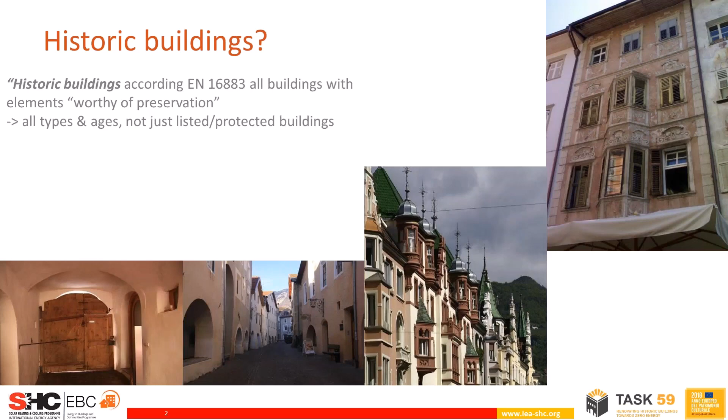So speaking about historic buildings, what do we mean? We orientate ourselves by the European standard 16883, which basically includes all buildings with elements worthy of preservation for architectural reasons or cultural or heritage reasons, which means basically we include buildings of all types of different uses from all ages, whether they are listed or somehow protected or not.

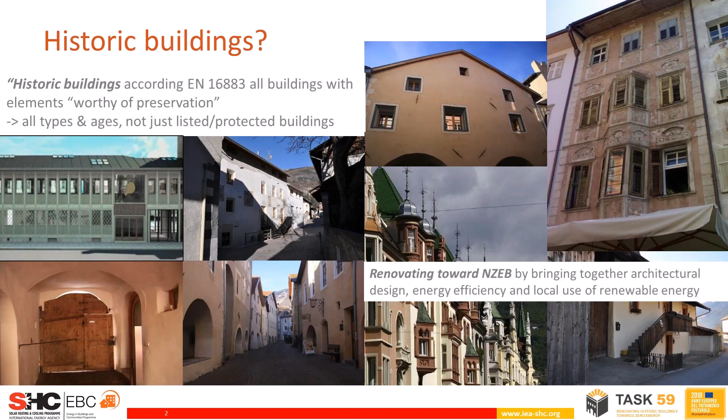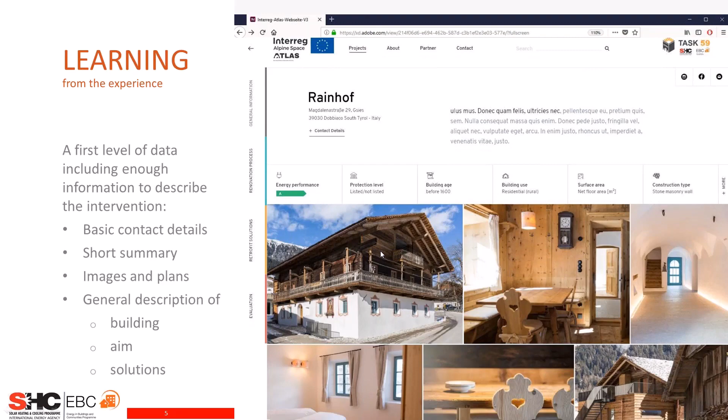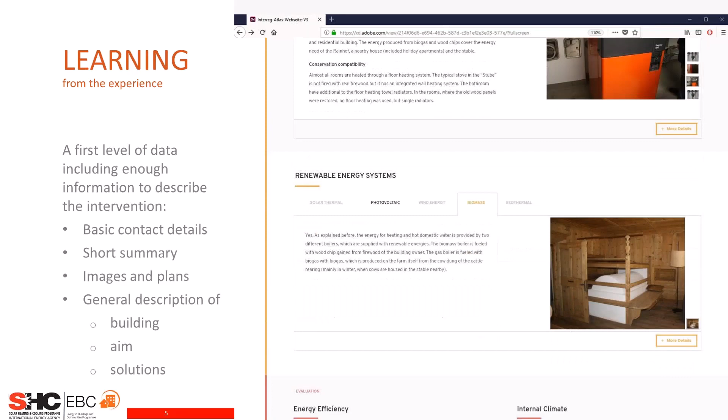So I would like to talk you a little bit through the different levels of information we provide in this platform. On the first level of information, you would see all the contact details, a short summary of each case study. You would find images and plans, of course, and if you go a little bit deeper, hopefully well-balanced pictures, drawings, text, also on the renovation process, but also on the technical interventions, walls, windows, HVAC, but also renewable energy systems. And finally, the evaluation part on the energy efficiency, costs and indoor climate, for example.

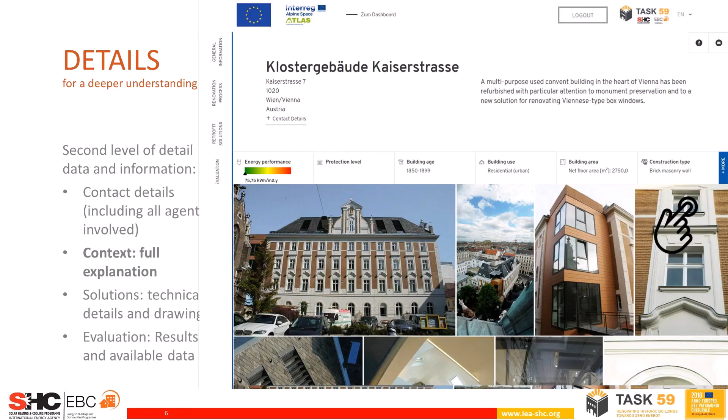This is an example from Vienna. If we go a little bit deeper here, you would find more specific information on this key information, building age, building use, technical data on the building, but you can also step into more detailed information on the renovation process from this point, or on specific information on the retrofit solutions, for example. So if you go down here, you would find a verbal description of retrofit solutions, for example, for the wall, but also reasons why specific interventions were chosen.

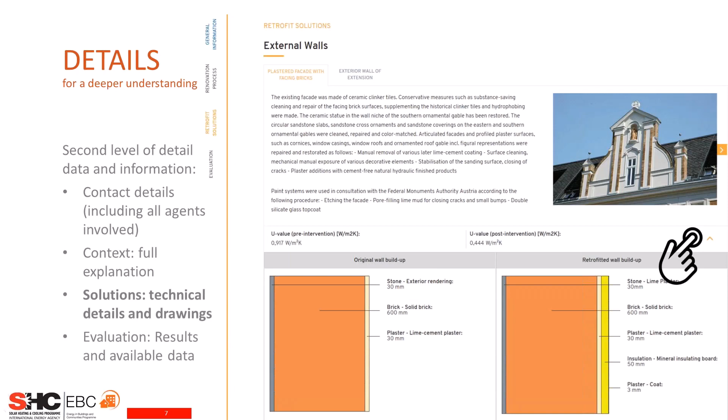You find U values, for example, before and after the intervention, but you can go one step deeper. And there you would find, for example, specific information, schematic drawings on the original wall build-up, but also the retrofitted situation. As you know, you will find that you have not only one type of wall in a building, particularly in historical buildings. You may find different types of walls, so there's also the possibility to find different solutions for different types of walls for a specific case study. And also the verbal description.

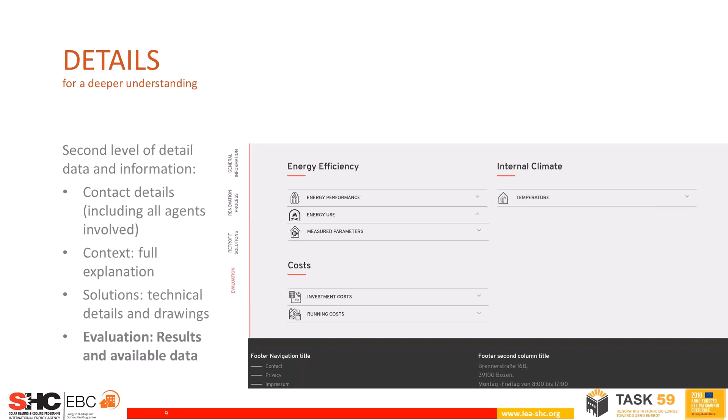And then finally, what is very important from our point of view, the evaluation part, where you find information on the energy efficiency, for example, actual data on the energy consumption for heating, but also data on not only the investment costs, but also, if available, the running costs and data on indoor climate. If there are no measured parameters for a case study, there is also the possibility to give a verbal description, for example, the feedback from the users on indoor air quality or acoustic comfort. But as you can see here, if there is such a document available, we provide, for example, a post-occupancy evaluation as a download from this platform.

So this is basically the content on the different levels you would find. As you can see on these logos, this is a combined effort from both the Interreg Alpine Space project, which involves 9 partners from 6 countries, and the already mentioned Task 59 from the IEA SHC program, which involves 24 partners from 12 countries.

And as I've said, we are aiming at about or more than 100 projects. We are happy to have established already the connection to other platforms, for example, to Construction 21. And we are also looking forward to connections, for example, to national platforms, as, for example, Stadt der Zukunft in Austria, but we know there are other possibilities to establish such platforms.

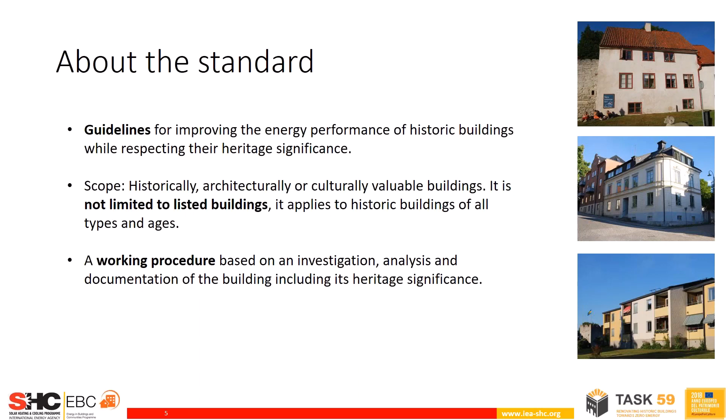It presents a working procedure which is based on simple steps: investigation, analysis, and documentation of the building, including its heritage significance. Now, this is the Solar Academy, and some of you may think, where does solar energy come into play? Well, the standard deals with improvements and energy renovation, applying both to the demand and supply side.

The standard or the guidelines presents a procedure to facilitate the best decision in each individual case, rather than trying to point at good or bad solutions in general, because as we all know, historic buildings as well as buildings in general represent a wide range of uses, construction types, so it's difficult, not to say impossible, to point at universally applicable solutions, but we rather point at a way to reach a good solution in each case.

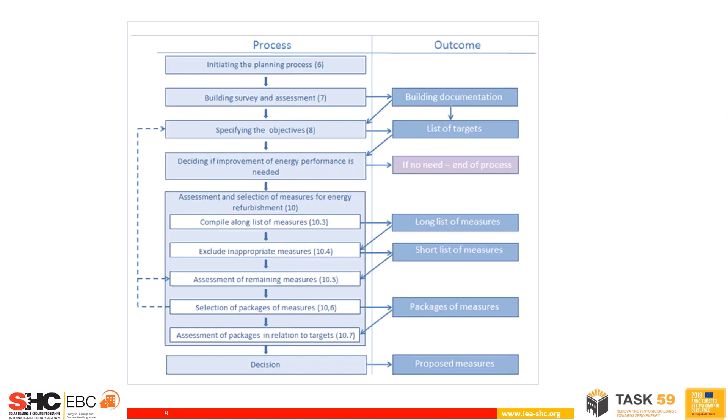For those of you who work professionally in the field, I would assume or hope that this is nothing new, but rather something that you recognize. For those of you who may be private homeowners, this may be completely new. So this means that the standard, or the guideline, can be used in several ways. You can use it for quality assurance and then follow it strictly.

Suppose the authorities in a country or a region want to ascertain that when we work with historical buildings of a certain value category, we follow a certain procedure. It can be used as an inspiration to modify existing procedures. I think that most professionals working in the field, one way or another, already have a working procedure. And finally, it can be used as a simple checklist, as a whole or in parts.

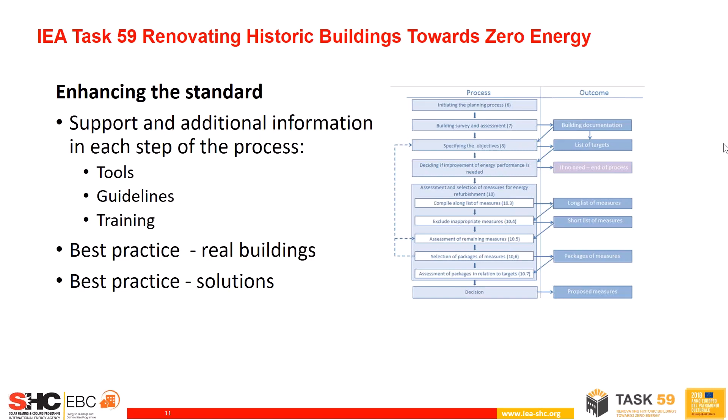Some questions to the audience: is the standard known, is the standard being used? We're trying to find projects and professionals who have used the standard, and we want to find out how it works in practice. Within Task 59, we're working to facilitate an extended use of the standard by enhancing it and providing additional information in terms of tools and guidelines, the need for training, and we also have other tools in our toolbox. Walter already introduced the best practice database, and we also have a database for single solutions that are suitable for different types of historic buildings.

So in summary, my objective with the presentation was to let you know that there is a standard. There are also other guidelines that can be used, and we're always looking for more case studies. So if anybody is interested in using the standard or already has done it, please feel free to contact me. And also, of course, if you have any questions.

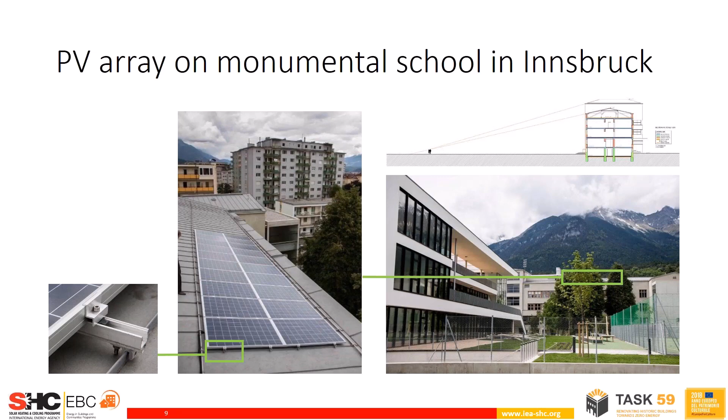So that's why we also decided to create the decision guidance tool, to document such good examples and many more that can show others how to follow such installations without starting from the beginning, and to share these success stories. So now I would like to show you the functionality of the tool. It's not the real website, but just a presentation where you can see how the tool is supposed to work.

To be able to cover all the renovation measures, not just solar, but all of them, we decided to display first a cross-section of a building where everything is involved and visible. So the user can select by clicking on the building element, or select from the menu on the left-hand side. In this case, we would start with solar energy, right down there, like this. And then the user will be asked just several questions. The first one, for example, is whether you can install your renewables on the roof as the first, most advantageous option.

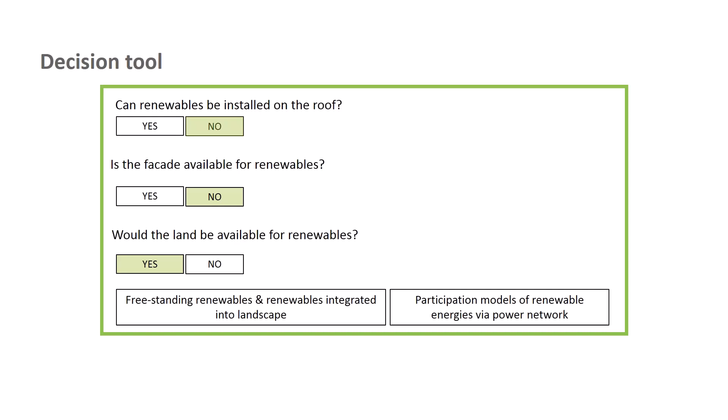If not, the facade is offered, and so on. And if there are really no other options to install PV on your building, then at least we would like to display solutions where a freestanding installation is allowed, or participation models of renewables via the power network. So if we used the same mentality and wanted to find this example of the school in Hötting, we would probably go like this.

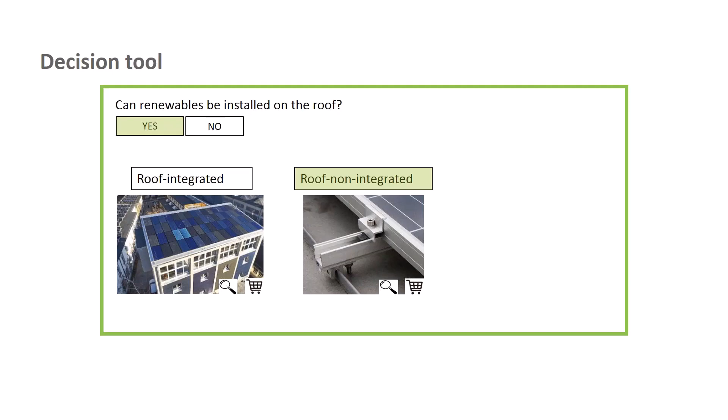So renewables on the roof, yes, but it should be roof non-integrated. Here we go, and then we click a preview, and then we're gonna see all the details about the installations and components, installation powers, and drawings.

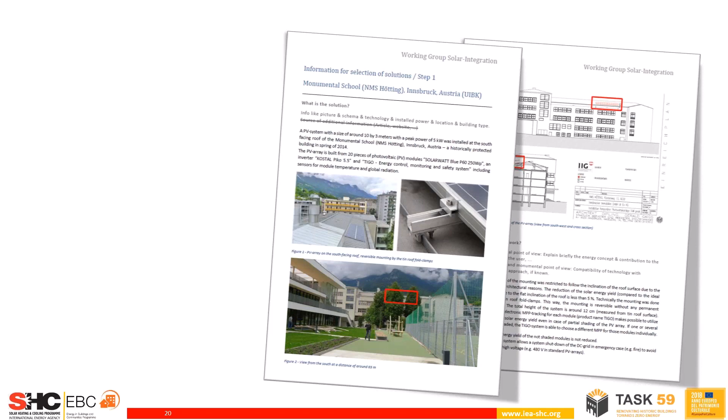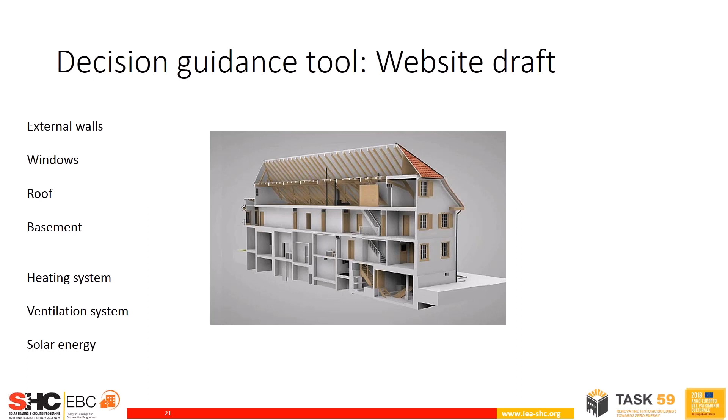So as I said, this tool is not restricted only to renewables, but as you see, to building envelope, such as walls, windows, roof, and so on, but also building services as heating, cooling, ventilation systems. So let's proceed with the example of our walls. So we click on wall.

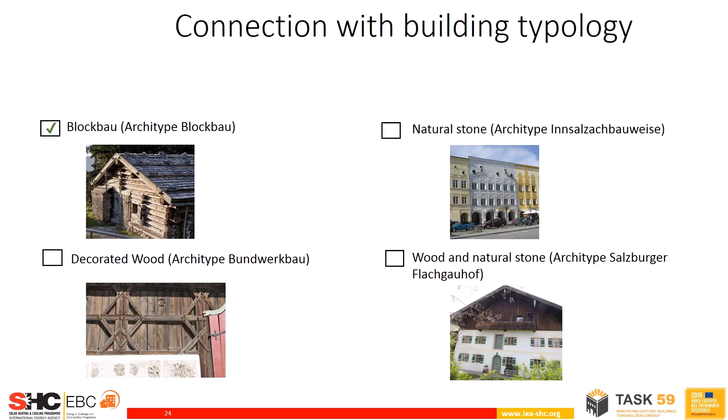And if you decide to use the map, you will be offered a set of archetypes, certain architectonical types of buildings. You select yours, and as before, you will be asked several sets of questions, which will break down the selection to just several. So you will be able to see and decide for general principles or particular examples of, in this case, wall insulation.

Since the walls are very much in connection with the windows, for example, after choosing your detail, you will be directed and offered also to see the window details, because these cross sections and details really matter while you plan your renovation. As you see here, each solution has a magnifier and a shopping bag. I will get back to it.

We are not a profit-oriented European project, don't worry.

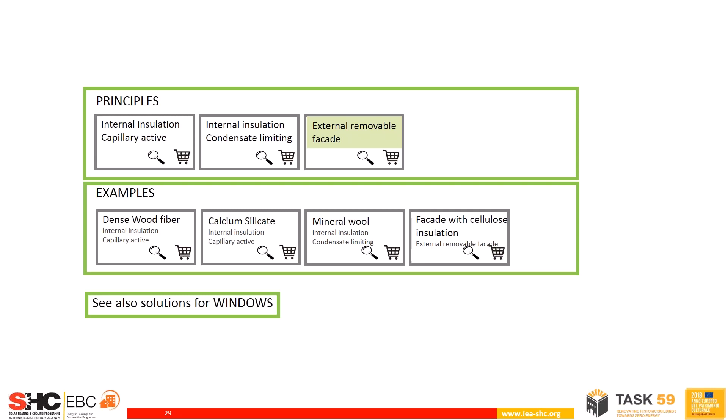So the magnifier is just there to increase the size and be able to read what is inside, and the shopping bag is basically just to save it into your bag for later printout. So if you click on the magnifier, you see the solution, and same as before, you can get more informed about what this solution is about. And if you would like to save it, you click on the shopping bag.

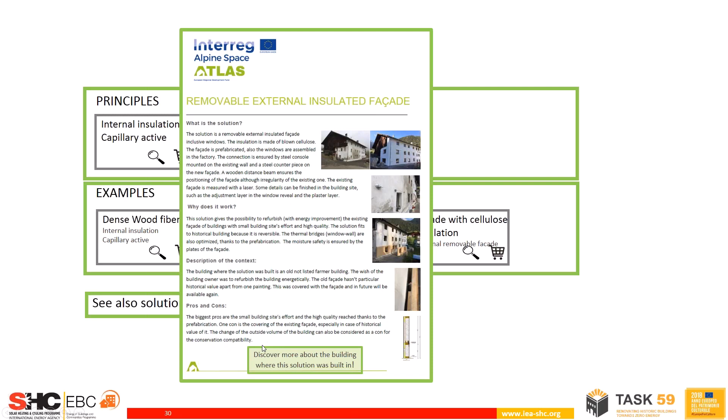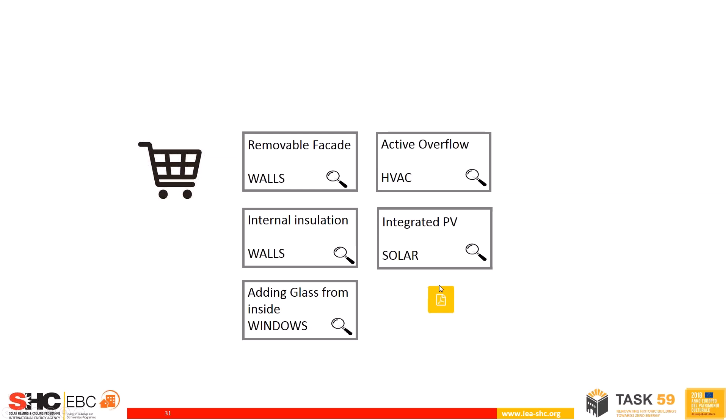If this solution is part of a building which is documented as a renovated building, so-called best practice, that was the part presented by Walter, you can also jump and see the building renovation in the database itself. And when you are done with playing and searching in the tool, you can go to this shopping bag or shopping trolley, where all your saved details and solutions are, and you can click and export them to a PDF once you're finished.

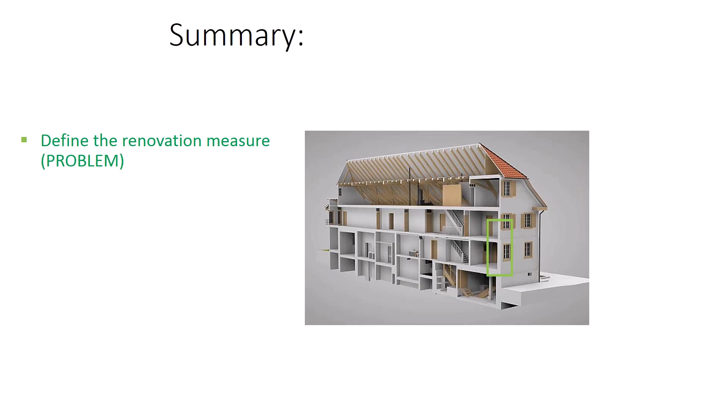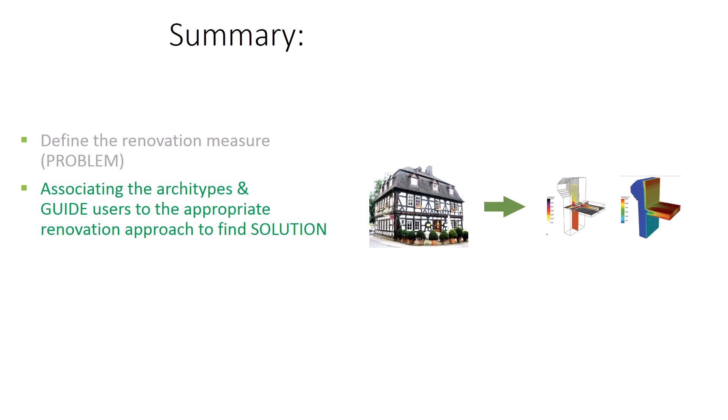So let me conclude. What is this tool about, and why should it matter to you? It follows this mentality. We start with the problem. We help you to define the renovation measure in a visual way. Then, by associating the archetypes, we guide you, the user, to an appropriate renovation approach to find the exact solution you are searching for. And if documented, we demonstrate a real case study where the solution was implemented.

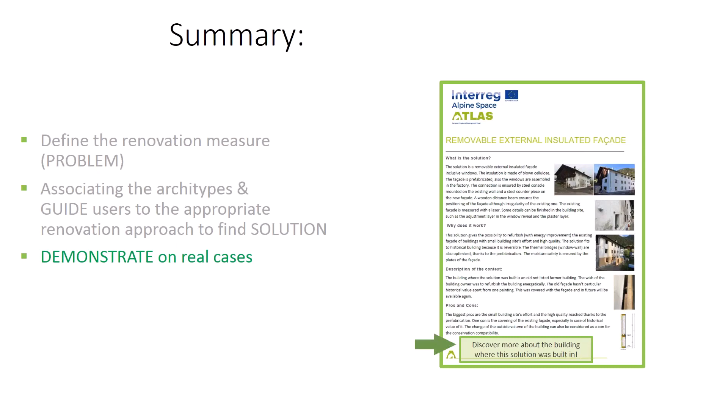So the message is to inspire the user to renovate and not to rebuild, not to demolish, but keep the old spirit and preserve the European heritage we have here by demonstrating the real solutions.

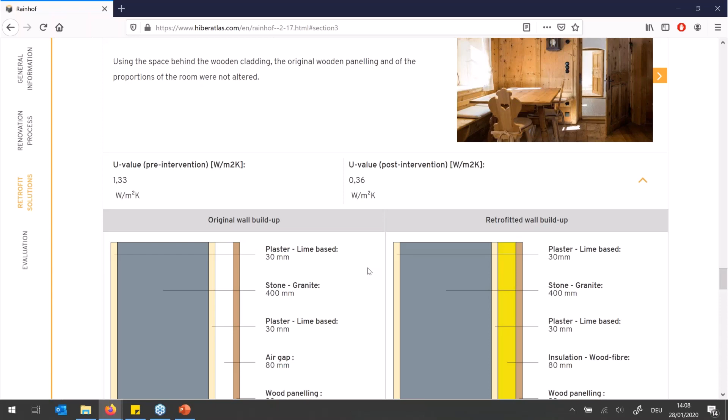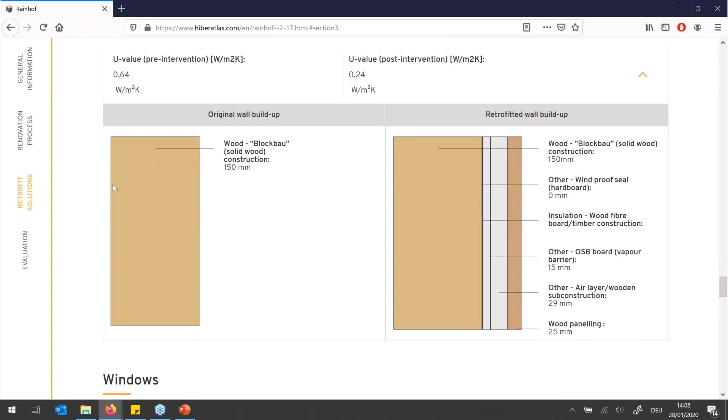If we click on the more detailed section, we can see a sketch of the wall from the construction before, that was made of plaster, a stone masonry wall and plaster, to a retrofitted wall build-up in which the internal insulation plaster has been added. The same structure is followed for all the other wall types. From the stube, where the insulation is added in between the stone masonry wall and internal wooden cladding, the substitution of the ground floor in the rear part of the building, and the insulation of the Blockbau, the solid wood construction, with a wood fiber board panel applied to the inside.

When it comes to the windows, the original wooden windows that were painted in a bright blue color were replicated with new units that were crafted by a local carpenter who designed a modern window with thermal glazing that can be implemented in a frame that replicates the original unit.

Also, the roof and the ground floor were insulated, and the U value of these parts of the envelope was highly improved. In the case of the roof, from 2.7 watts per square meter Kelvin, the value was reduced to 0.2, and in the case of the ground floor, from 3.29, it was brought down to 0.28.

Also, the heating and domestic hot water systems were replaced. In this case, the original heating system, as I explained before, was based on open fires that were fed directly with logs. And now there is a combined system that uses both biomass and biogas, both produced on site. The biomass is directly brought from the woodlands around the farm, whereas the biogas is obtained from the manure of the cattle that is reared in this farm.

Eventually, all the energy produced directly on site from the renewable energy sources is enough to cover all the energy demand from the main house, the Rainhof, with the private residence and all the holiday apartments, plus all the farming activities, plus a nearby house, and there's still some excess of energy produced.